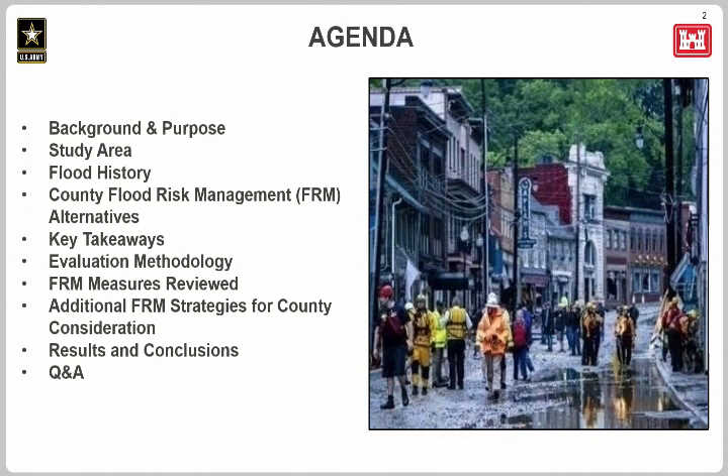So the background of this study: the two devastating floods that occurred in 2016 and 2018, those flash flood events resulted in a number of studies undertaken by Howard County to attempt to identify how to prevent future events from occurring at such an extreme level.

And as the county moved through their studies, they requested the Army Corps to come in and perform an independent evaluation of those studies, of the modeling that occurred. So when I say modeling, I'm talking about modeling the storm events, and then also how the river systems flood in response to those storm events. And the Corps identified additional strategies for the county to consider moving forward.

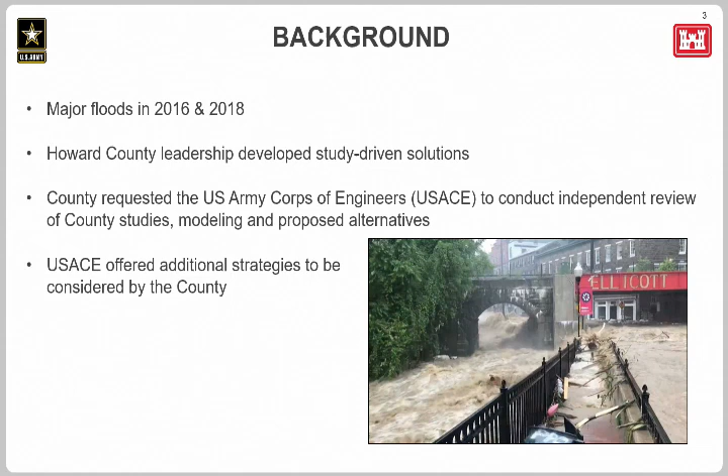So the Corps began this process by assembling an independent team of flood risk experts. They were intentionally assembled from outside of Baltimore District. Baltimore District managed the project, so myself and Stacy helped coordinate getting that team together, organizing the meetings, bringing them here for a site visit, and preparing this presentation and the report.

This team of experts came from multiple engineering disciplines: civil, hydraulic, geotechnical. We had a community planner, a cultural and environmental specialist, and a national non-structural flood-proofing committee member as well.

And as part of this review, we tried to leverage as much of the flood expertise that the Corps had access to. So we gave a presentation to the Maryland Silver Jackets, an interagency flood risk management group with federal, state, and academic partners involved. They were given basically as much information as we were given access to within a PowerPoint presentation as best we could. Their input was solicited and incorporated into this report.

Additionally, we performed that same sort of presentation to a national audience of just Army Corps flood risk experts via webinar, and we had something like 60 flood risk experts from across 20 Army Corps districts spread across the country, with 7 different areas of expertise involved in that as well. So we leveraged as much expertise as we possibly could for this.

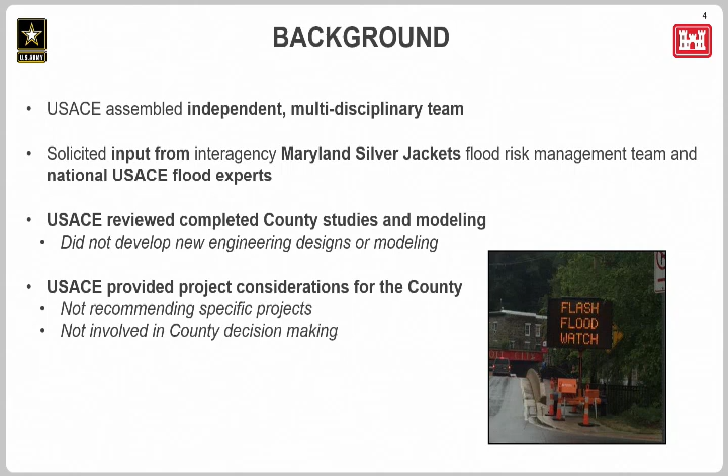So moving on to the next slide here. Our team, I mentioned already some of the background of the team members. We conducted our site visit in May of 2019.

A little bit on previous Army Corps involvement in and around Ellicott City and Howard County. In July 2009, we did some work updating flood maps for the Ellicott City watershed. In July 2016, we performed a debris clearing effort from the Patapsco and from the tributaries running through Ellicott City. In 2017, as Executive Ball mentioned, the Corps was involved in reviewing McCormick Taylor's hydraulic and hydrologic modeling. And in February 2018, some of you may have seen there was a non-structural flood-proofing study done for Ellicott City that gave examples for flood-proofing buildings in the historic district.

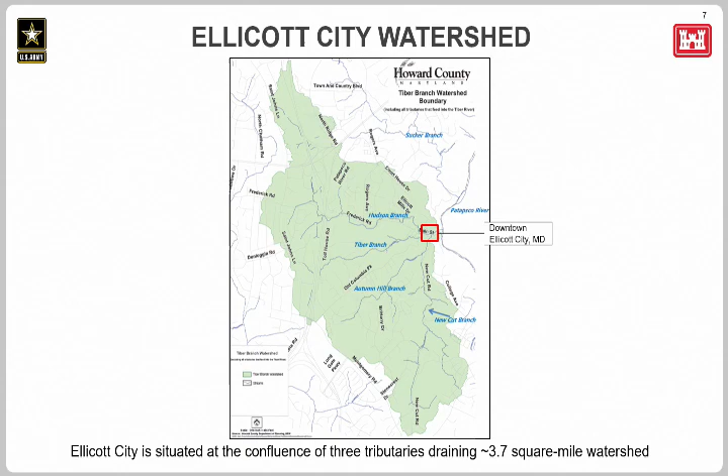So for the study area, I won't spend a lot of time here. Folks are familiar for the most part with the watershed, but highlighted there in red is your downtown Main Street area at the convergence of about a 3.7 square mile watershed with the Patapsco just to the east. In the downtown historic district, you have the confluence of multiple streams originally harnessed for their stream power for mills, the Hudson, the Tiber, the New Cut, all flowing around and sometimes underneath the city, joining the Patapsco.

The flood history here in Ellicott City, as folks are aware of, has occurred two different ways. What we're referring to here as bottom-up, or Patapsco River flooding, from the bottom of the watershed, and then the top-down, which are the steep, flashy flash flood events that occurred in 2016 and 2018 were examples of those. Since 1868, at least seven recorded major flooding events, some of them pictured here.

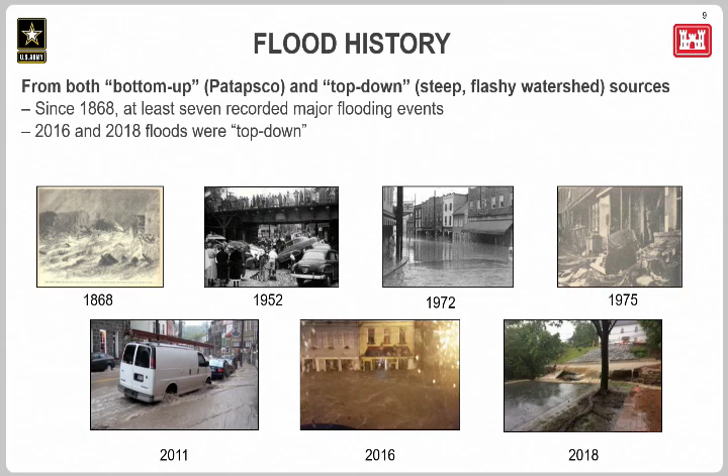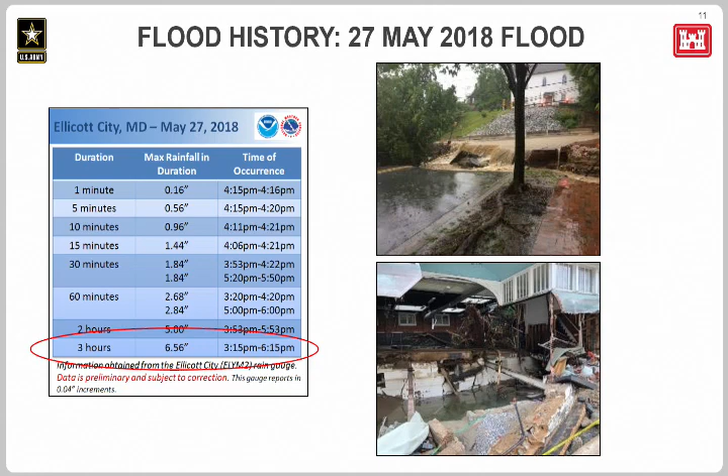So once the USACE team was assembled, the Corps team was assembled, we were starting with those 60 modeled alternatives. Each alternative, I'll try to be specific as far as the difference between alternatives and measures. Each alternative was comprised of anywhere between 1 and 14 of these measures.

Some examples of the measures include things like the underground diversion tunnels as one example. A culvert addition or improvement would be another one. But it also included above-ground storage ponds, below-ground storage structures, floodplain modifications, so the terrace floodplain, which includes things like building removal, and conveyance improvements, which could also include building removal or modification.

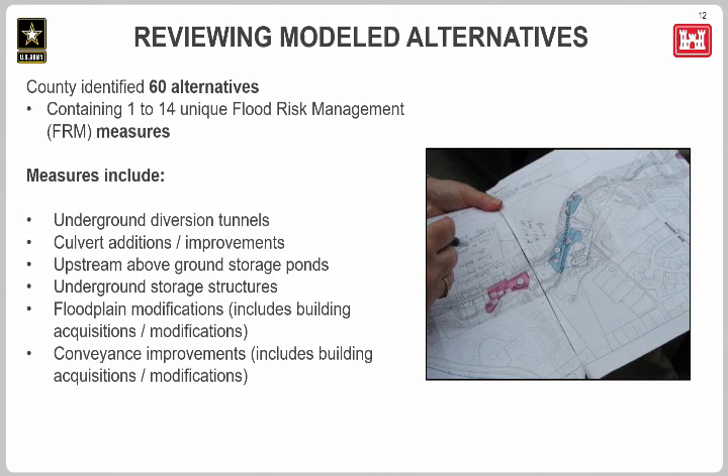And so the team was also made aware of some other steps that the county had already taken. So what are referred to as non-structural flood risk management measures, including the flood warning system that the county was in the process of calibrating while we were conducting our study. Evacuation planning, like the signs that are seen in downtown Ellicott City, and had also established a flood-proofing fund. Our team was made aware of these efforts while we were in the process of conducting the study.

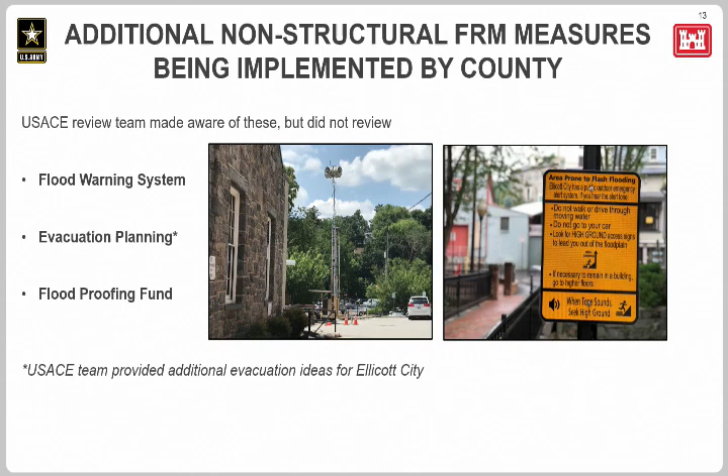And just as a note, we'll look later on in this presentation, but the Corps also identified a couple potential evacuation related measures or strategies for the county.

So the bottom line up front, the key takeaways from this evaluation is that the county considered a thorough array of flood risk management efforts or measures, backed by sound modeling. The measures considered by the county can effectively reduce flooding for Ellicott City, and those are the same types of FRM measures, like diversion tunnels, expanding culverts, storage up in the watershed, that the Corps considers in its own FRM projects.

Based on the evaluation, we'll look at the specific results, but based on the team's evaluation of the top measures that we identified, the county's plan, known as 3G7.0, includes many of the top measures as the Corps team identified. The Corps identified additional FRM strategies. We'll talk about those tonight as well for the county's consideration.

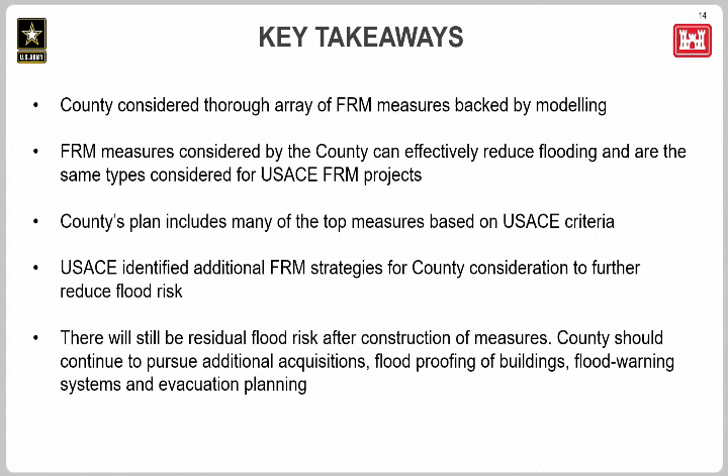An additional takeaway is that no matter how you try to address flooding, there's always remaining risk. The county is aware of this, but the Corps stressed in this report that Howard County should continue to pursue things like additional acquisitions of properties, flood proofing of buildings, flood warning systems, and evacuation planning, as these are sound ways to further reduce risk.

Getting into the methodology of the study, starting with these 60 modeled alternatives, we looked first at the alternatives that significantly reduced flood depths and velocities based on the hydraulic model we were provided with, looking at essentially the 2016 storm event. Of the 60 measures, we looked at 4 locations.

They're highlighted there with the 1, 2, 3, and 4, from Lower Main Street up towards the west end. We looked at which alternatives significantly reduced flood depths and velocities down to a target area of approximately 3.5 feet for depth and about 5 feet per second or below.

The alternatives that met that criteria we included for further evaluation. The ones that didn't, we excluded at that point, as one of the county's main goals was to get those depths and velocities down low enough that you can then protect structures with non-structural flood proofing. That's about the limit at which you can do that.

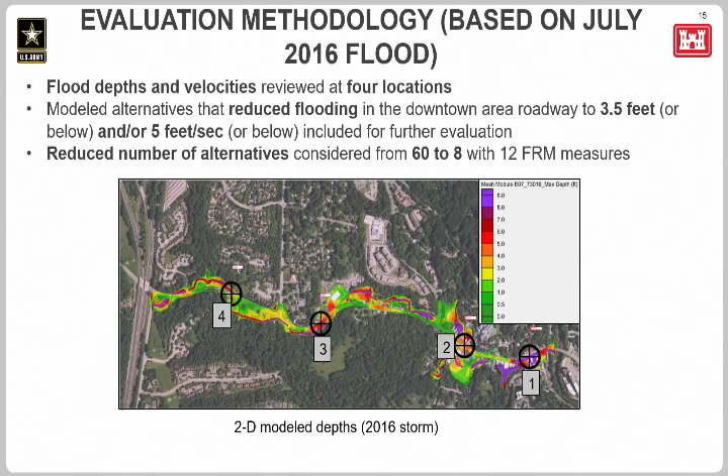So that reduced the number of alternatives considerably from 60 down to 8. And of those 8 alternatives, there were 12 unique measures. I know the terminology is a little much, but I'll show you the 12 measures right here. These were the top measures from the reducing flood depths and velocity perspective.

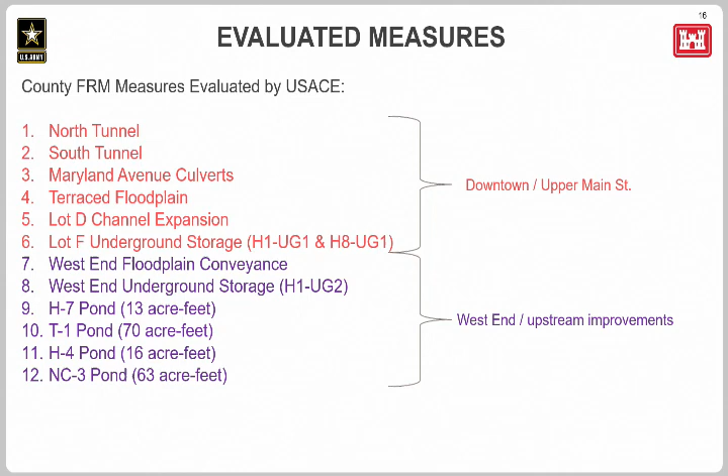Starting with the downtown / upper Main Street area as far as location, the ones that made the list were the North Tunnel, South Tunnel, Maryland Avenue culverts, the terraced floodplain, the Lot D channel expansion, Lot F underground storage - I'll be going through these one by one, including showing a map so folks can follow along - West End floodplain conveyance, West End underground storage, and the remaining were a series of above ground storage ponds, which we'll look at as well.

Continuing on the methodology, and then we'll look at each of those measures. The way the team conducted this evaluation was essentially by developing a set of criteria by which to evaluate each of these measures. These were developed based on reading through all the documents, the watershed master planning documents, in discussions with the county, and then based on the best professional judgment of the flood risk experts involved. We developed this list of 8 criteria.

So those are: prevention of loss of life - the idea was for each measure, to what degree does it impact these criteria. Prevention of loss of life, to what degree does a measure reduce flood depths and velocity, what are the economic impacts of each measure, what's the impact on preservation of historical/cultural values or community cohesion - kind of lumped a few together there - environmental impacts, operation and maintenance, initial construction costs, and

what we call implementation duration - how many years, or approximately how many years, would it take before you have a functioning structure or a functioning system in place. As a team, we assigned numbers to rate each of these measures against these criteria, and we were comparing each measure compared to one another, so relative to one another.

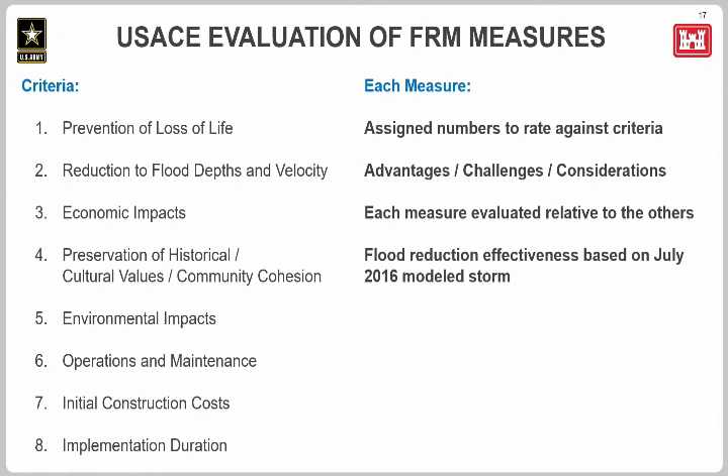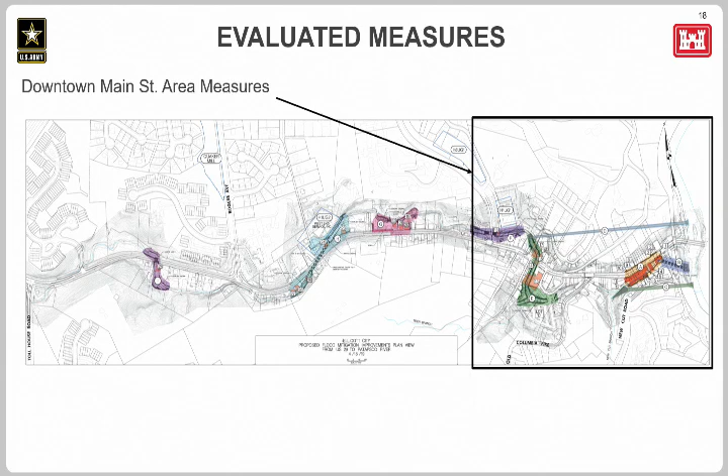So now we'll take a look at each of those 12 measures that made the cut as far as that depth and velocity initial criteria, starting in the downtown area, then we'll move our way west upstream there.

The first one evaluated here was the North Tunnel, and I'll give a little background on each one. It's circled there in black, and this is conceptual as far as location - this is not a full engineering design - but approximately 1,600 feet long. It was modeled, as reviewed by the team, at about 15 feet in diameter.

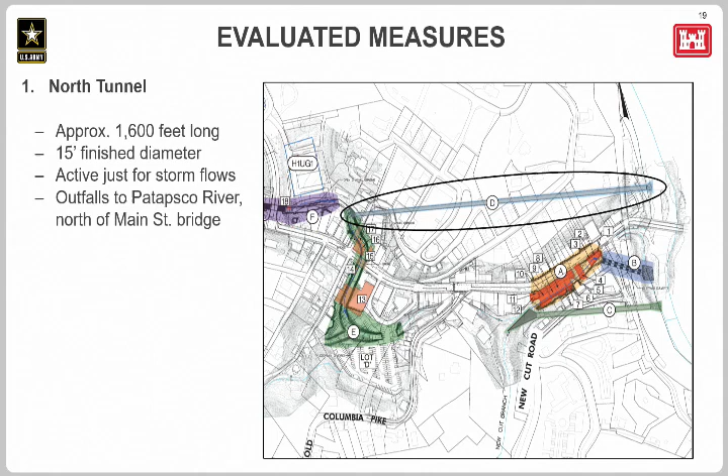It's active just for storm flows, so that means when there's not a lot of water in the system, there's no water in the tunnel. This outfall on the far right side of the screen, the outfall is in the Patapsco River, and it's passing under the CSX railway line.

In addition to the matrix that we created, the Corps felt it was most valuable to provide the county, for each of these measures, the advantages, challenges, and considerations. This is really the meat and potatoes of both the report and the matrix. I won't touch on all of these, but they'll all be available in the report for public review. I'll touch on a few for each one.

For the North Tunnel, some of the advantages included little impact to historic structures and no impact to community cohesion. Essentially, it's not a disruption to the downtown area, especially after construction. Once complete, it's almost as if it's not there.

As a standalone measure, based on the modeling, the North Tunnel produced the most significant reduction to downtown flooding on its own. Some of the challenges include cost - of those listed, it would be the most expensive. Significant engineering challenges included constructability and duration, from boring a large tunnel through bedrock to passing under an active railroad line.

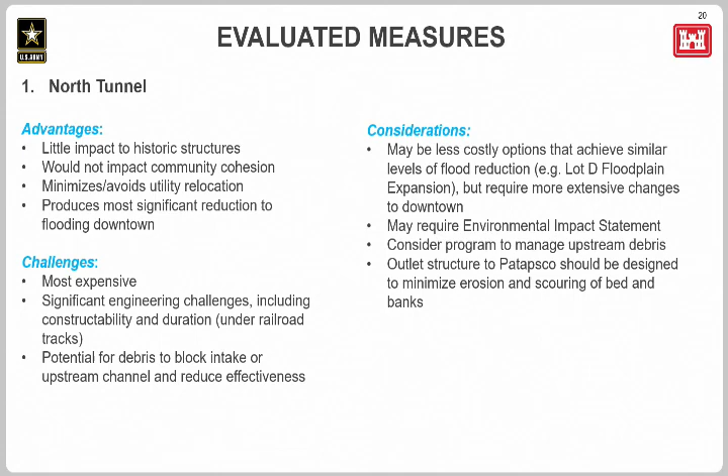The county executive mentioned a program in place to manage upstream debris. That was something the team brought up a number of times - you'll see that on these slides - and it's something the county is already pursuing.

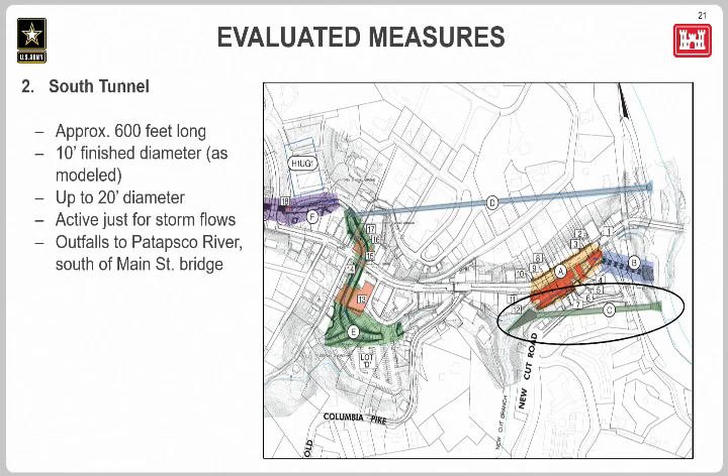Next up was the South Tunnel - shorter in length, modeled at various diameters, also active when storm flows are flowing through the channels. It also outfalls to the Patapsco River and passes under that same active railway. A lot of the advantages, challenges, and considerations are very similar to the North Tunnel. The team did find, based on reviewing the model, that it was less effective hydraulically than the North Tunnel. That had to do with the slope of the tunnel - essentially the North Tunnel was more effective in passing floodwaters.

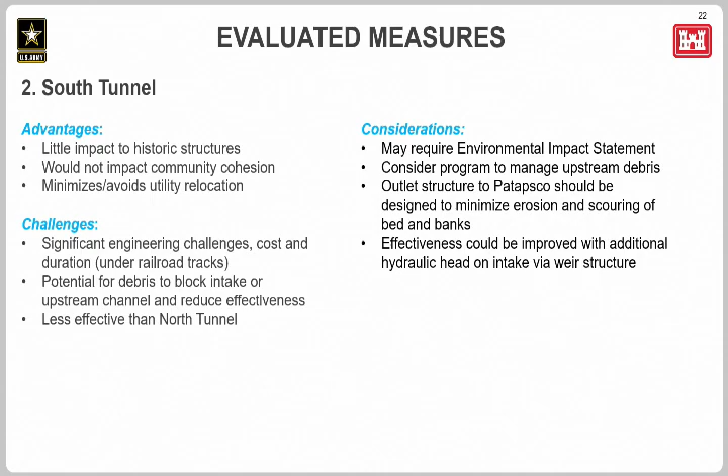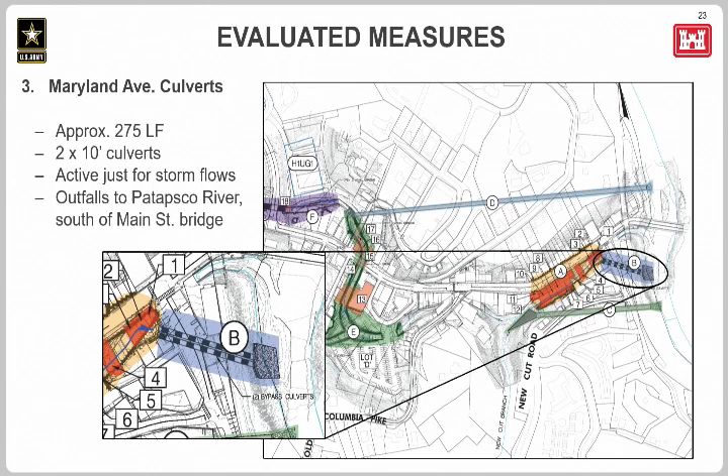Next up is the Maryland Avenue culverts, circled there in black with the letter B, zoomed in towards the left. This was modeled as about 275 linear feet long, two 10-foot diameter culverts passing from approximately Maryland Avenue, right where the Phoenix Emporium currently is, and outfalling to the Patapsco River as well. Some of the advantages: this measure also showed significant reductions to flood depths and velocities, both on Maryland Avenue and lower Main Street below it.

Some of the challenges are similar to those of the tunnels - these are essentially just two smaller tunnels. Also, a challenge for the Maryland Avenue culverts is that, due to the nature of its location, it would require the removal of a number of the buildings on that southwest corner of the Maryland and Main Street intersection.

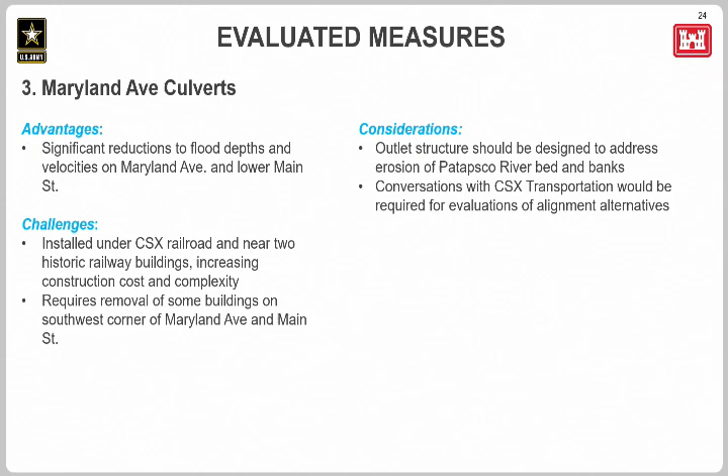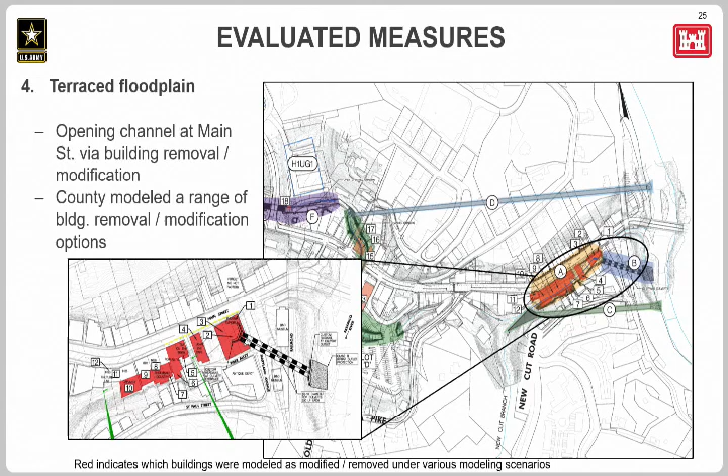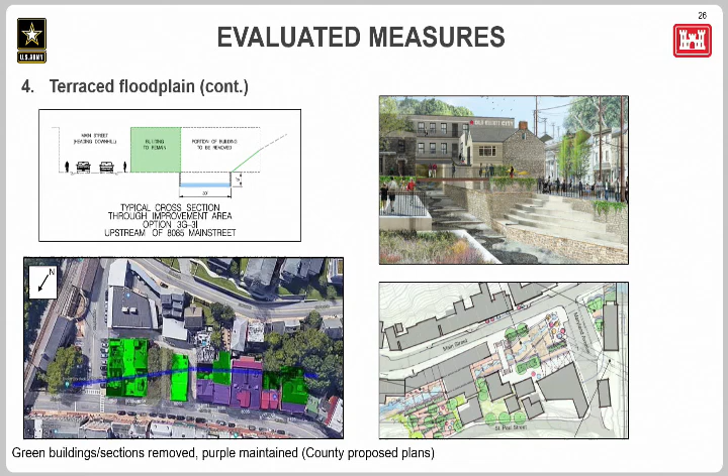During our review, the county's plan that they were currently considering, and still are, included the removal of 4 buildings. The team was aware of that. Those are highlighted in green in the bottom left, along with the backs of buildings in green to be modified - either the lower portions removed to make more room for the river, or removed completely - with the buildings in purple to be maintained. Our team was made aware of what the county's current plan was at the time, and still is.

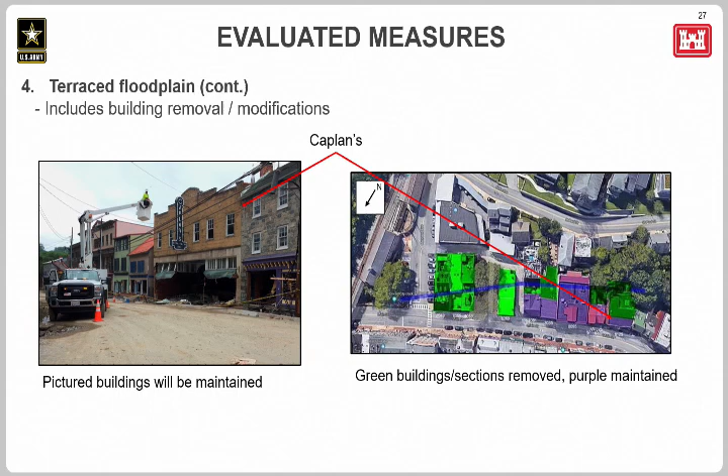This is just further detail, for folks who are mostly already familiar with it - pictured on the left, those building facades would remain in place, either the whole building or just the facade, based on this current proposal.

So for the terrace floodplain, some of the advantages that our team identified: the Corps' standard is that if you remove people from a flood risk area, you save lives and reduce property damage. The removal of those structures does both, and has the potential coincident benefit of a few of these measures.

Although they were designed to address steep flash flooding events coming from upstream, if and when you have a Patapsco flood event, some of these measures would actually also help reduce risk. For instance, this one: if you don't have buildings in place there and the Patapsco floods, you have a reduction in flood risk.

The team felt that some of these parks that were envisioned, or some of these downtown areas, could over time actually become destinations for both residents and tourists visiting Ellicott City. Although it is a change—certainly that's one of our considerations or challenges mentioned in the report—these obviously result in changes to the downtown feel.

In a few of these slides, when I say there's an opportunity to develop riparian and in-stream habitat, I mean that anytime you're doing work in or alongside a stream, especially if it was channelized like the downtown area is, if you open it back up you can do things like plant trees along the banks. That's known as the riparian zone, just alongside streams. Then within the stream, you can build structures, make it a little more sinuous, and introduce habitat for fish and insects.

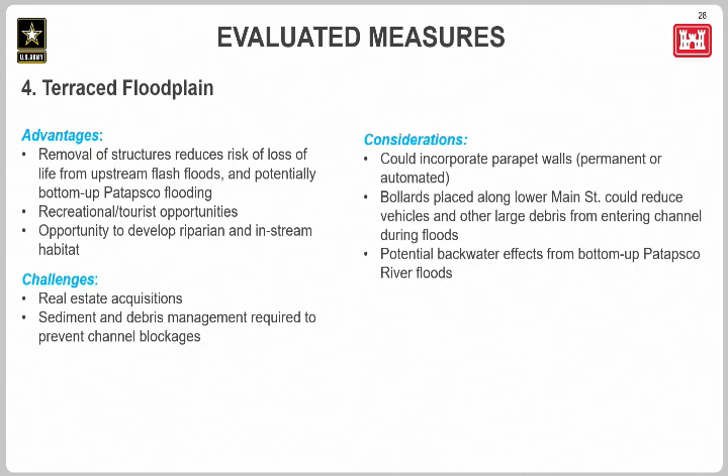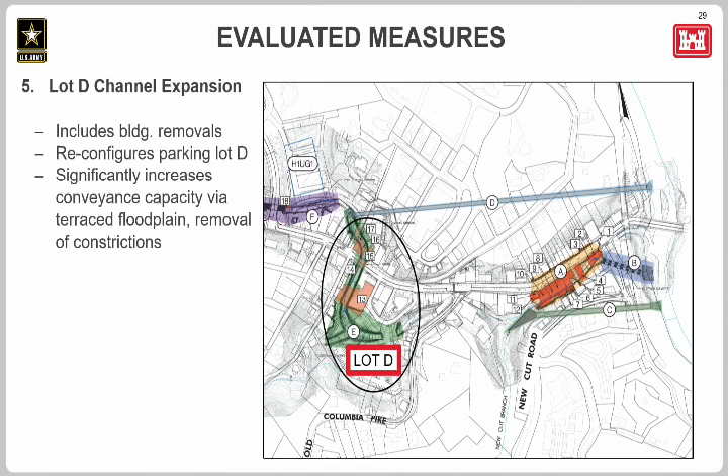Moving on to our next one: Lot D channel expansion, circled there towards the left side. I'll show a couple more pictures and renderings from the master plans to refresh everyone's memory. This includes building removals, business relocations, reconfiguring Lot D, and we saw from the modeling a significant increase in conveyance capacity—basically allowing more water to move freely and easily through this area.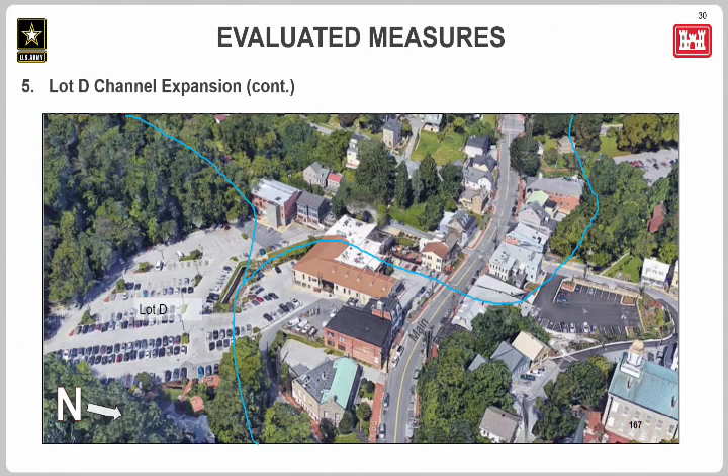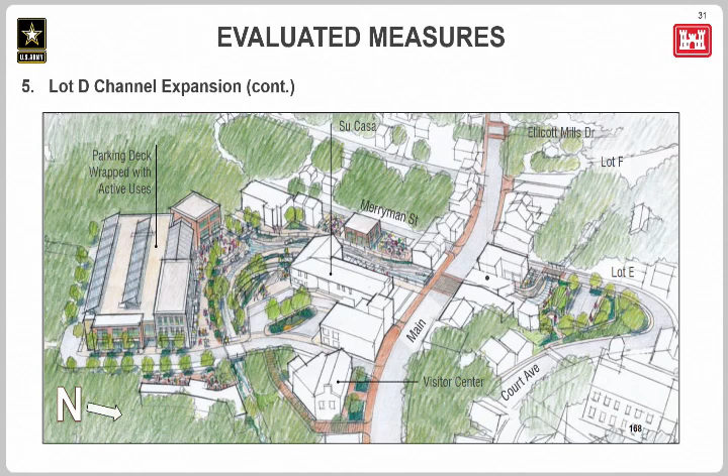So Lot D as it currently exists, with the Hudson and Tiber running through and underneath. This was from the earlier watershed master plan, and this is how the team was presented with this potential measure, or at least an idea of what it might look like. It includes removal of, I believe, La Palapas, daylighting the stream—which is often in culverts through this area—and creating an additional terraced floodplain around that bend. This rendering envisions a potential parking structure.

As advantages hydraulically, the model showed that this measure significantly reduced flood depths and velocities downstream, down on Lower Main Street. Based on the team's best professional judgment, it would be less costly than the tunnel options, and there are opportunities for habitat improvement. But some of the challenges were significant changes to this area: removal, relocation, or modification of potentially historic structures, impacts to the main utility corridor running down Main Street, and depending on Lot D's configuration, potential loss of parking.

Considerations: parking could potentially be moved elsewhere, and we also saw that over time this could be viewed as a pretty walkable, park-like space that could actually draw people to it.

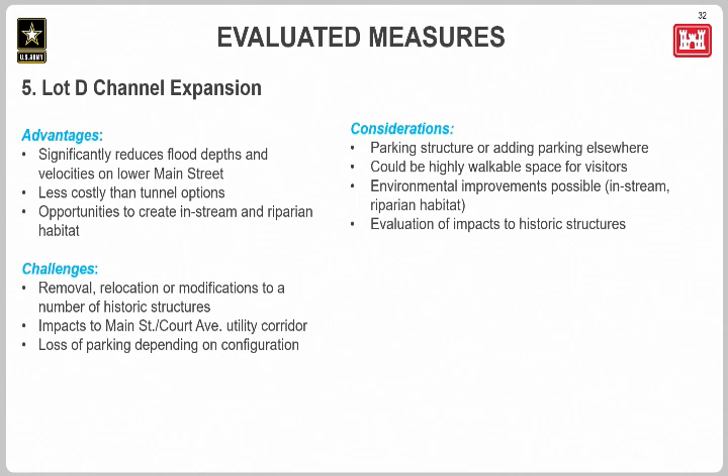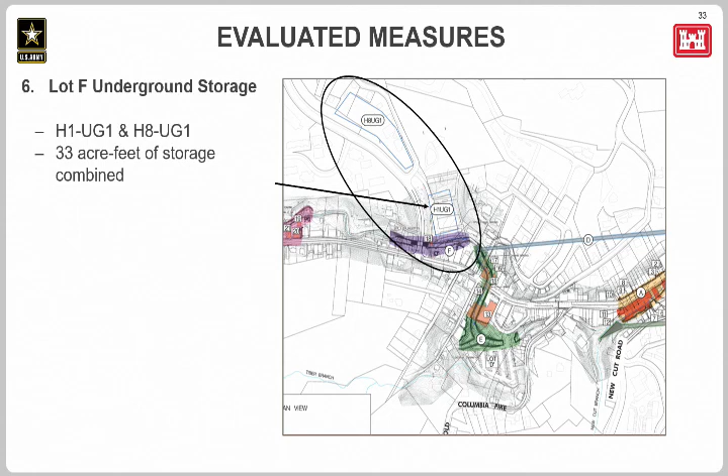Moving on to number 6, this is what was known as the Lot F underground storage structures. These would be below ground. Essentially, they can be designed different ways, but imagine a concrete vault that can fill with water when there's a flood flow passing by. These two are slightly hard to see, but they're boxed off there in light blue. There's an H8 underground UG1 and an H1 UG1, and they combine for 33 acre feet, which is how we measure water storage. We'll see a range of storage capacities in the next few slides. I'm calling them out there with those arrows to make it a little easier to see.

For these underground storage structures, they provide things like water quality benefits. They capture sediments, which often include some pollutants, so they offer a water quality benefit. Because they're located underground, after construction is complete, they're essentially invisible, so they have little impact to the historic feel and look of downtown.

Some of the challenges: anytime you're storing flood flows, if you have a large enough storm event and that structure becomes full, then it's no longer functioning and basically no longer reduces flood risk. We'll see that with all the storage structures here as far as challenges. But these below ground storage structures are going to be more costly just due to the construction process than an above ground storage structure.

Anytime you dig underground, especially in a place like Ellicott City, for all of these structures, you have the potential for impacts to archaeological resources. That's something we've made the county aware of, as far as starting that process early to conduct archaeological studies before digging. And these structures require regular cleaning — they fill up with debris and sediment.

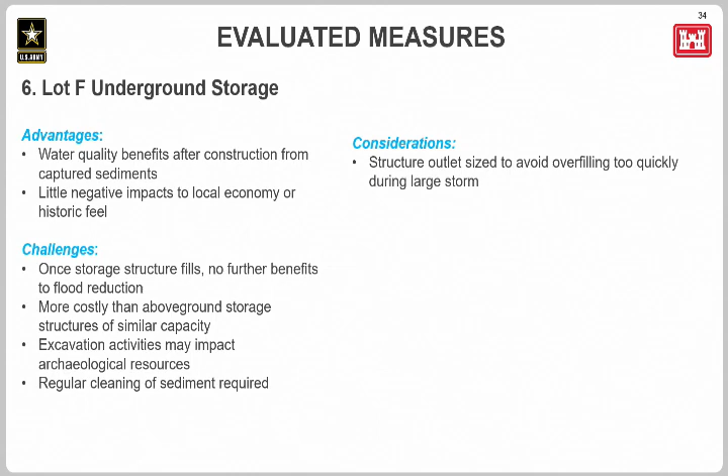So moving from the lower Main Street, upper Main Street area, we'll move towards the west end. The west end conveyance improvements are number 7, looking generally at the Ellicott Mills Drive upstream area. This measure was designed to about double the capacity of the roadway culverts below Main Street and Frederick Road, so to pass more water underneath the road, keeping it within the channel.

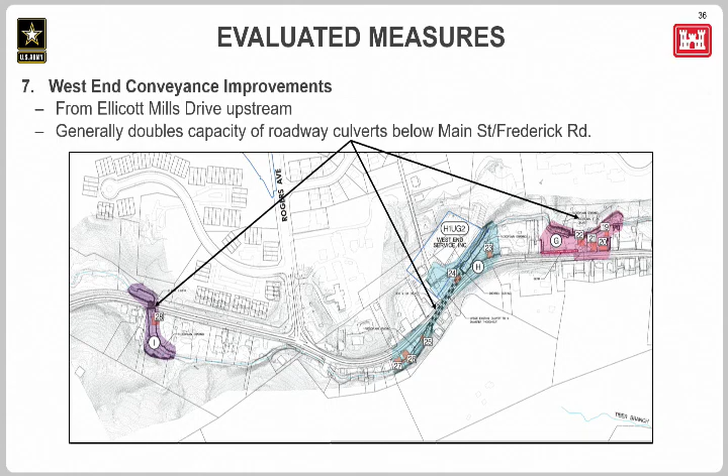Advantages we saw from the model: reductions to residential and roadway flood depths, but it was most effective for smaller storm events. As they were modeled for larger storm events, there would not be enough capacity for these culverts. But because of the potential extent along the streams that this project might entail, there was potential for improvements to aquatic habitat.

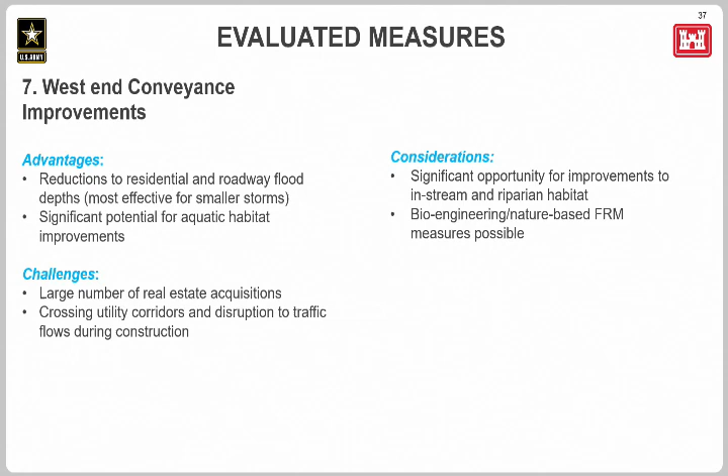Challenges include potential for a number of real estate acquisitions, crossing the roadways, crossing a utility corridor multiple times, which would certainly result in disruption to traffic flows during construction. One consideration is when you're doing in-stream habitat improvements, you can potentially include what the Corps calls nature-based flood risk management measures. If anybody's curious about that, I'm happy to talk about it after the presentation.

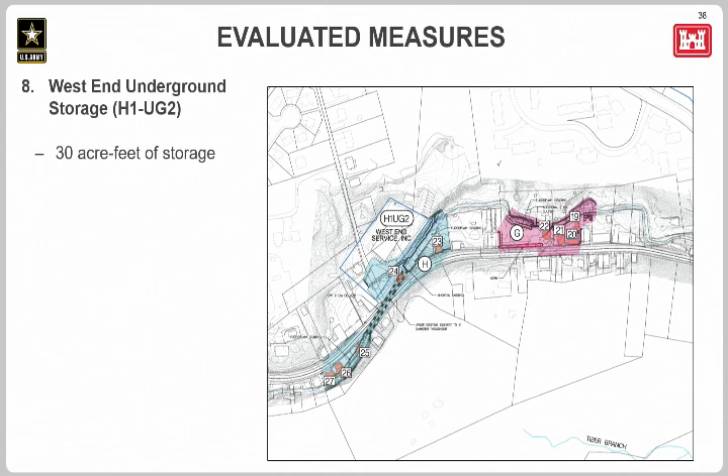The next one was an additional underground storage structure in the west end, and this one was 30 acre feet in size, located here. The advantages, challenges, and considerations are almost the same as those previous underground ones I just discussed — essentially the same thing, an underground storage vault of pretty good size.

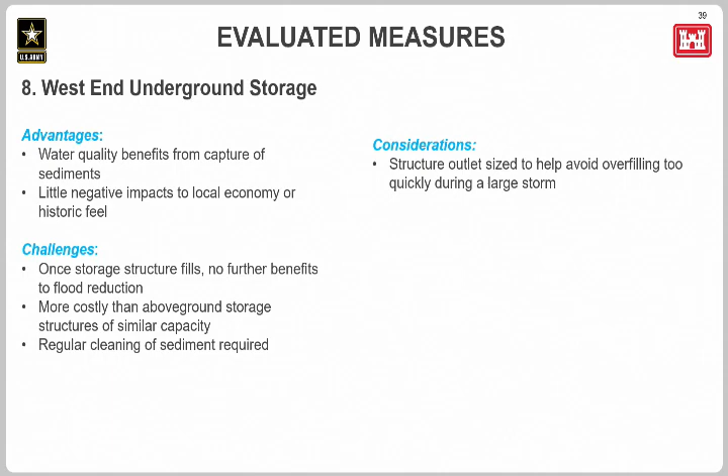I'll move on to the above ground storage ponds, and there were 4 of them that made the list, and they're pointed out here.

Starting with number 9, what's known as the H7 pond, 13 acre feet, located — it's kind of hard to see — in the interchange between US 29 and US 40, sort of in that clover leaf. H4 pond, 16 acre feet. T1 pond, significantly larger, the largest we've seen tonight at 70 acre feet. And the NC3 — T1 is for Tiber, and NC is new cut, on one of the new cut branches — at 63 acre feet. These are, if you've driven around neighborhoods, what looks like a dry pond.

These would be designed slightly larger, slightly bigger, but designed to hold flood flows to a certain point and then release those flood flows much more slowly than if they were not in place. The advantages, challenges, and considerations are very similar to those underground structures, but these are a bit cheaper, and they're open air and visible — not below ground.

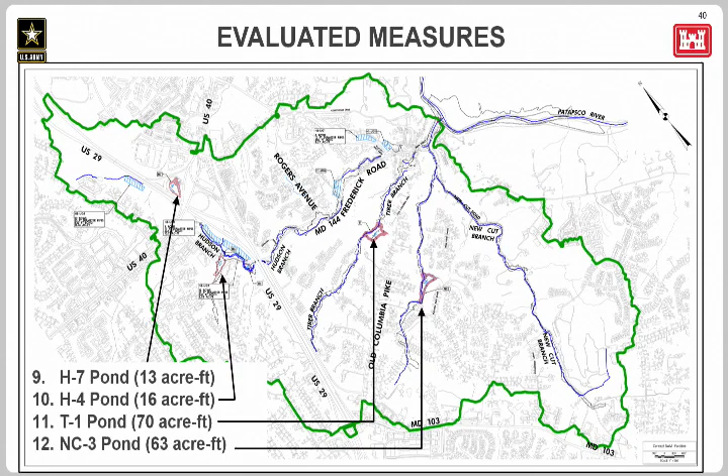So the next few slides, I'm going to talk about some measures that were identified by the Army Corps team for the county's consideration.

So we ended up calling this one targeted conveyance increases. What we're trying to get at here is especially the lower portions of Ellicott City, you have a highly channelized system, and a lot of these channels are old. In some places they're not very big, so you have a lot of water trying to go through a small area. So what the team identified, generally as a concept, was expanding channels, either widening or deepening through dredging, and/or putting parapet walls or small flood walls along the tops of the channels. If done throughout the downtown area, the idea was that you could potentially allow enough storm flows to pass through to handle a 2016-size storm event in the channels.

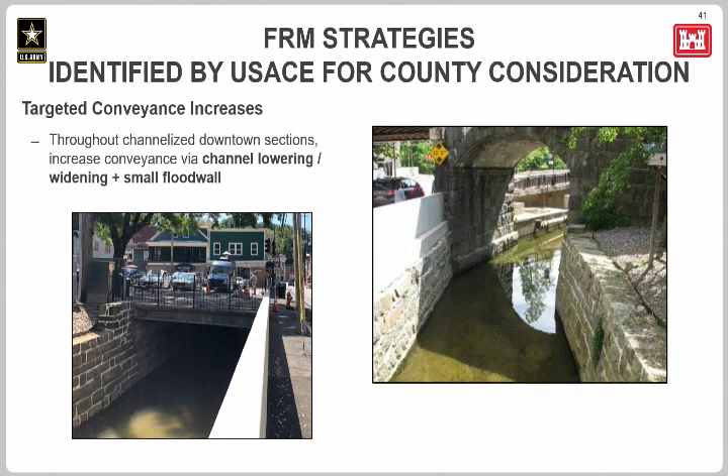But it comes with plenty of challenges and considerations as well. First off, there's going to be a lot of geotechnical studies required, since you'd be putting a lot more fast-moving water through areas that pass right along buildings. Something like this would certainly require structural studies of those buildings, and may require structural reinforcement of buildings right along the channels. There's also the possibility that the channel walls themselves are historically significant, so you'd have archaeological or historic implications. And even small flood walls throughout the downtown area could certainly impact the look and feel of downtown.

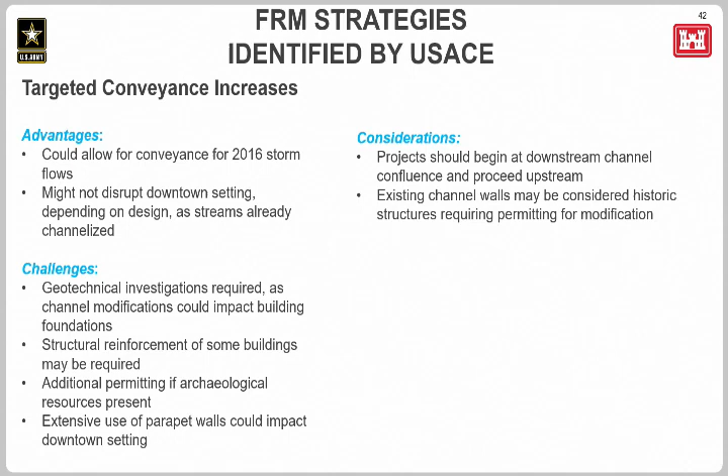And additional considerations—I think I covered those already. So let's move on to the next one.

This next one the team identified as a dry flood mitigation structure on the New Cut. By dry flood storage structure, we mean one that doesn't hold water during normal sunny days. The flood flows from the New Cut contributed significant amounts of water to both the 2016 and 2018 flood events, and a dry flood storage structure could be sized large enough to reduce peak flows coming from that subwatershed.

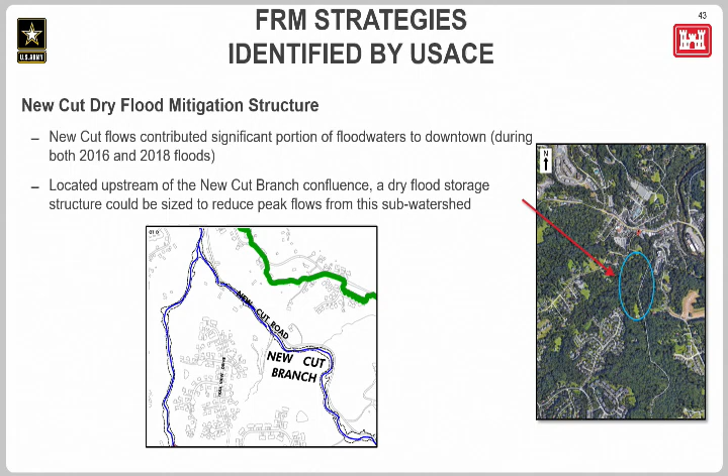So the advantages of a structure of this size is that you could significantly reduce those peak flows coming out of the New Cut. And that embankment and reservoir behind it would actually capture a lot of the debris coming down the New Cut—rock, wood, other debris.

I mentioned some of the challenges: it would likely require relocation or closure of New Cut Road, and acquisitions for numerous properties along the New Cut. It's likely that the State of Maryland, because of the size the team conceptualized it as, would classify this as a high hazard dam, which would require a particular type of engineering design and construction. The embankment would likely be roller compacted concrete.

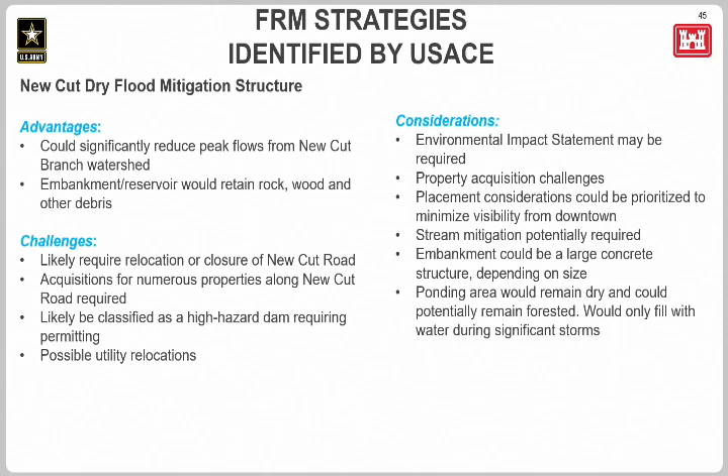Some additional strategies, flood risk management strategies identified by the Corps included, I mentioned a couple times, the environmental improvements. So we just want to make sure the county had that on their mind as they're doing this work on streams.

The team discussed or identified in the report potential for additional parking restrictions downtown. Anytime you can keep both people and their vehicles away from flash floods, you've got a potential to save lives. And of course, things like additional parking areas or shuttle services are something that the county would have to address and figure out.

The debris removal program we talked about, so lots of times in these flash flood events, debris clogs the channels. I think I've got a good picture on the next slide. I know many folks saw those cars jammed underneath bridges, and those significantly add to further flooding once you get channels blocked up.

And the team also identified potential for another evacuation plan or route. We called it elevated egress walkways, but the team conceptualized behind the buildings on Lower Main Street having some walkways that folks could use to vertically evacuate in buildings and then get to higher ground via these walkways.

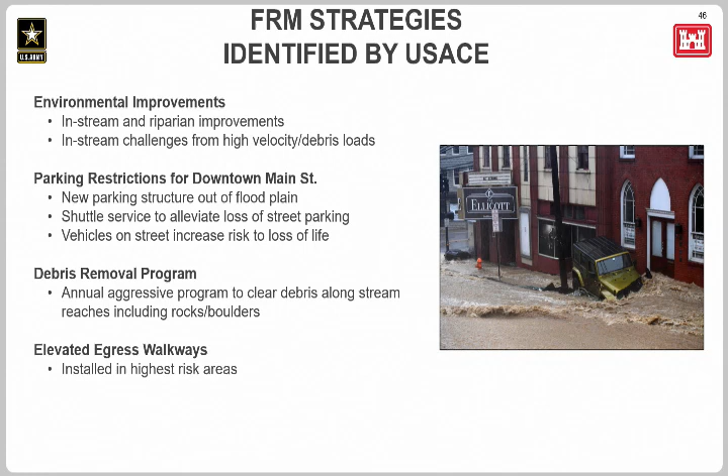And three other flood risk management strategies. So I just mentioned the vertical evacuation plans from the buildings. You could have property and business owners responsible for making sure the folks in their building know how to get out during a flood event.

And for modeling analysis, the Corps is recommending, putting forth for the county's consideration - and I think some of these the county may be pursuing - modeling each measure, so each tunnel, pond, etc., on its own so that you can look at the benefits for each one. And then including additional storms, modeling more storm events, because they're not all going to look like the 2016 or 2018 storms. Having other ones to compare and contrast to can help decision making for which measures to select.

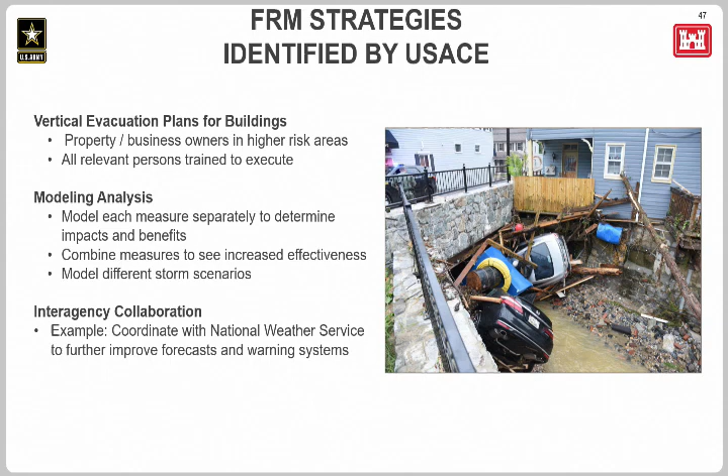And lastly, interagency collaboration. So as much as feasible, as much as possible, continuing to coordinate with particularly the National Weather Service to help improve forecasting for this flash flood area.

So we made it through all the measures and strategies. So what came out? How did they shake out?

So out of our evaluation matrix, we assigned scores, and I will say as a caveat, because we started with the ones that were already reducing flood depths and velocities, they all scored pretty well because they're all contributing in one way or another to reduce flood risk. So we did have a top tier, our top third as far as scoring, a middle third, even though it's a small group, and a lower tier. But again, from the top to the lowest, there was not a tremendous amount of differentiation as far as scoring.

North and South Tunnel were at the top, and this was based on those 8 criteria I talked about earlier. North and South Tunnel, the Corps identified that targeted conveyance increase ended up scoring towards the top there. The Lot D channel expansion, Maryland Avenue culvert, and T1 pond, that was the largest. The NC3 pond was the second largest storage pond.

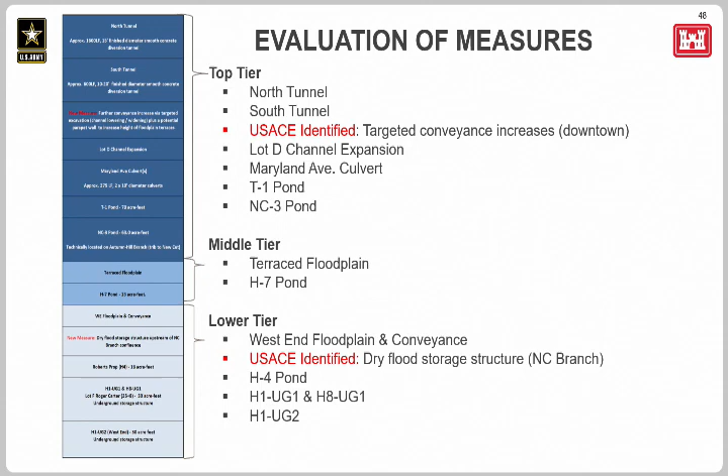And our key takeaways - I stated it early on, but the Corps found that the county's processes were sound and that the modeling was robust. So those affirmed measures that were backed by the modeling.

The measures considered by the county can effectively reduce flooding for Ellicott City, and those measures that they're considering are the same types that the Corps would use in their own flood risk management projects. The county's plan, as we just saw, includes many of the top measures that the Corps team identified for this evaluation.

And as we talked about, the Corps identified additional strategies and measures for the county's further consideration.

As I mentioned before, you can never totally reduce flood risk. So the Corps stressed in this report that the county continue to pursue things like additional acquisitions, flood proofing of buildings, flood warning systems, evacuation planning, to further reduce risk and ultimately, hopefully, save lives for future flood events.

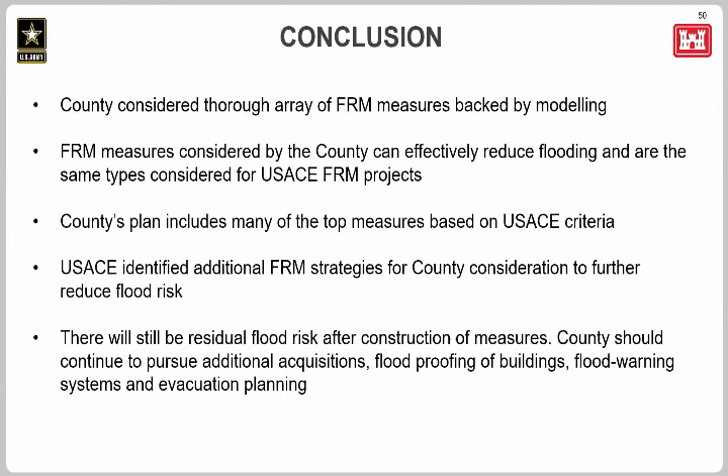So that's it for the presentation here. I think we're going to open it up for Q&A, and I went ahead and included the EC Safe and Sound link, where ultimately this report and the matrix will be available.

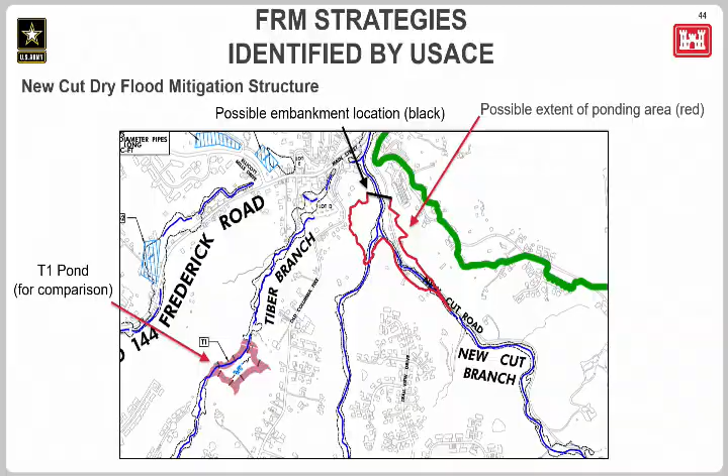Well, it would have to. I mean, under this ponding scenario, the road would have to be removed, so it would be closed. But again, this was a conceptual idea.

Yeah, and that may be the case, but thank you.

In defense of the Corps' thinking, we welcomed ideas. Not everything you throw against the wall is going to stick, but it can also germinate other ideas, so I think everything has value. That's how I think of it, and I understand that there could be those of you who think that losing New Cut Road would be a non-starter, but it's an idea, right?

Yes, can I just ask, if you're getting rid of New Cut Road, the people that live on New Cut Road, where do you go?

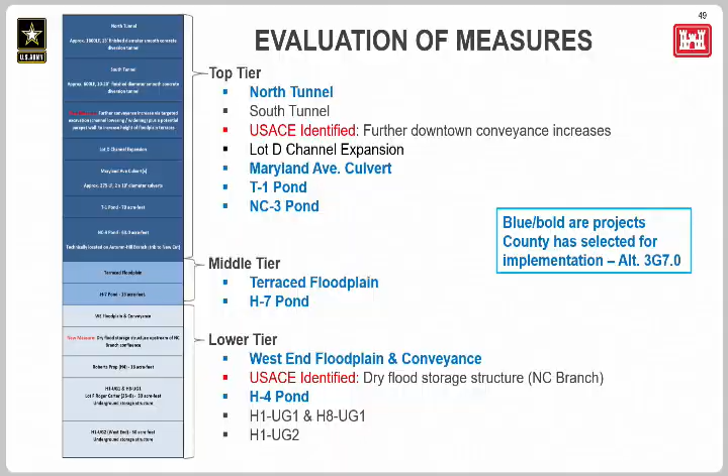Schedule-wise, this project is being done a little differently than any of the other projects, so it has a somewhat different time frame. This is a project where we're hoping to do it as a P3, and I know that you're aware of that, so it doesn't fall neatly into our schedule. But because I don't have everything to show, we could talk after the meeting. What I want to say is that it is on the timeline, it is on the schedule of projects, and we're focusing.

We are focusing on Lower Main, but we're also focusing somewhere in the 8600 block as well, where we have the big culvert we're trying to get across the street. That's kind of the point I was really trying to make, that we are doing things in other parts of the watershed. But at the end of the day, what we really want to do is, instead of having that tarp over the front of a building, we want to have a business inside of it.